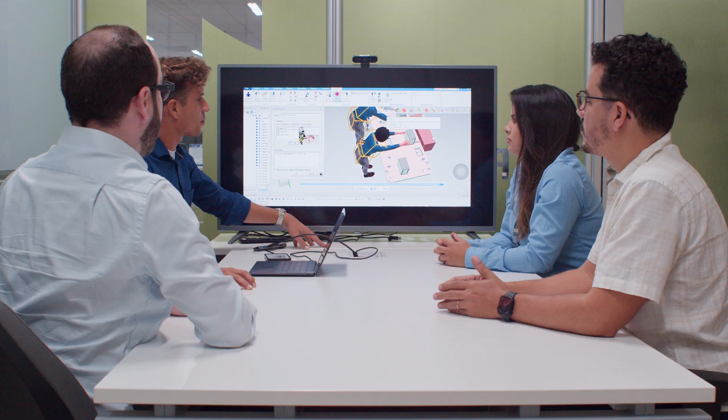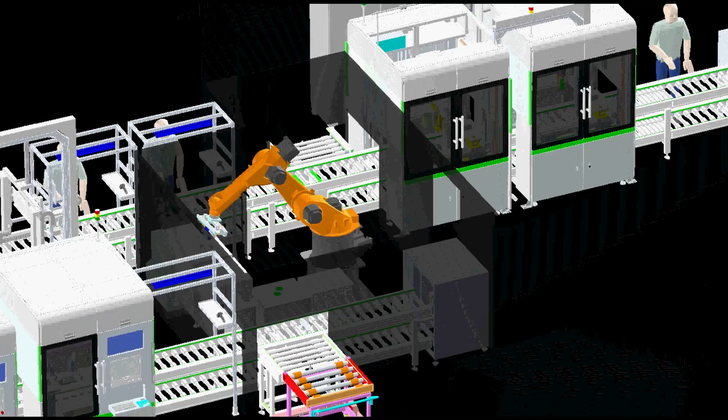The biggest challenge in developing a solution that isn't fully understood, especially when starting from scratch without a foundation, is managing to control all the variables realistically. So the SENAI Innovation Institute will adopt Siemens' portfolio, called Siemens Xcelerator, in order to understand various complex scenarios. What is the best technological route to take? How do I guarantee operational safety? And of course, operational excellence, aiming to ensure these batteries have an appropriate cost at the end of production.

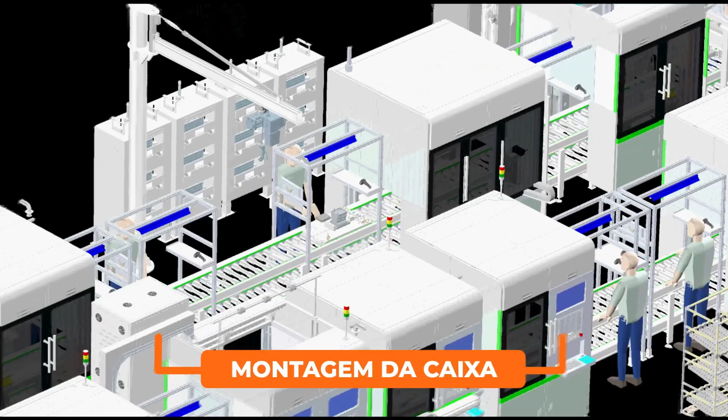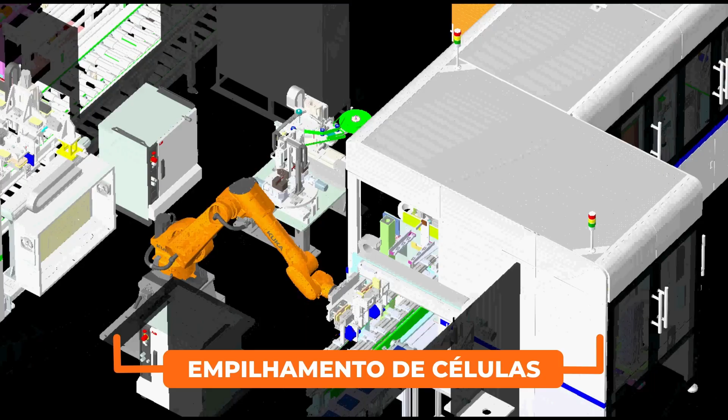When we see a technology that works across all sectors, but that can be applied in the automotive, oil and gas sectors, it is very difficult to make those connections without seeing practical cases working, operating, with projects already executed using that technology. True digital transformation isn't about applying a single technology in isolation.

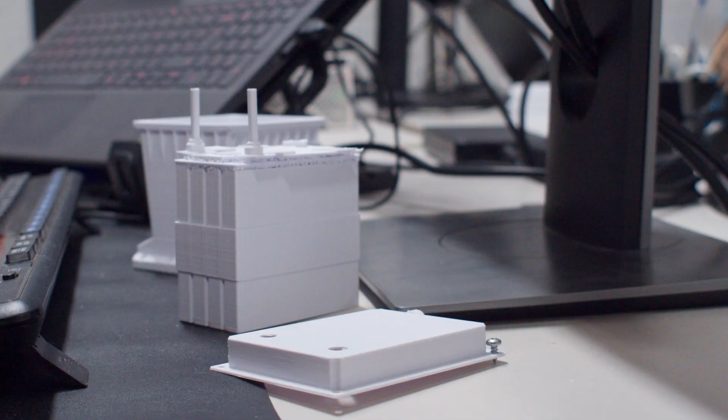This SENAI project is quite innovative because it aims to commission this plant with this digital pathway in mind, creating this true digital twin even before the plant exists, which will later be connected to the real world. So our expectation is that this pilot plant, this specific environment, will be a major driving force for the development of the supply chain in Brazil.

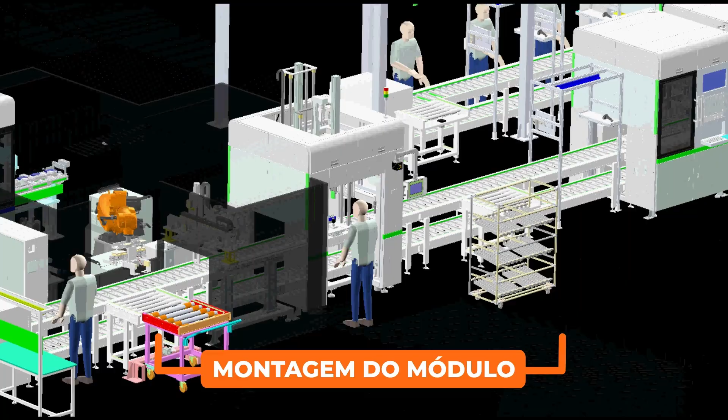Because after this development, testing, and validation phase in a pilot plant that will supply approximately 10,000 batteries per year, we will already be able to have a realistic projection and simulation of the market before companies launch large-scale projects to meet this national demand.

In June 2025, we were in Detroit at the Realize Live event and received an award in the digital transformation category. This award reinforces our role in the digital transformation of the industry and confirms that we are on the right track, generating impact and direct results that can spill over into society.